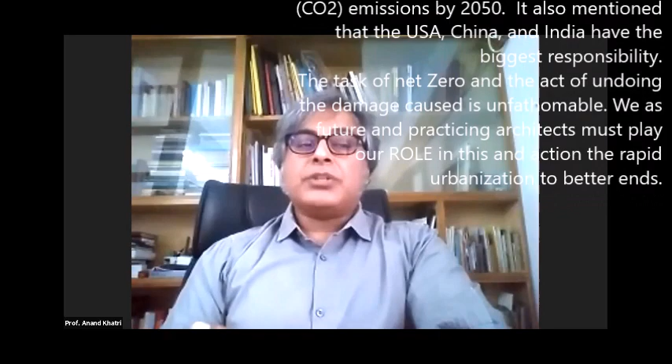The world by and large right now is screeching towards a net zero world ahead of us. The Chilean presidency at the 25th session of COP25 announced a renewed climatic ambition alliance in which 73 countries have committed to accelerate action by 2020 to achieve net zero CO2 emissions by 2050. It lays emphasis that USA, China, and India have to show the way. The task of net zero and undoing the damage is unfathomable. We, as future and practicing architects, must play our role in this and channel rapid urbanization to better ends. None else could be better to discuss this subject than Mr. Ashish Rakheja, who has been demonstrating net zero through practice.

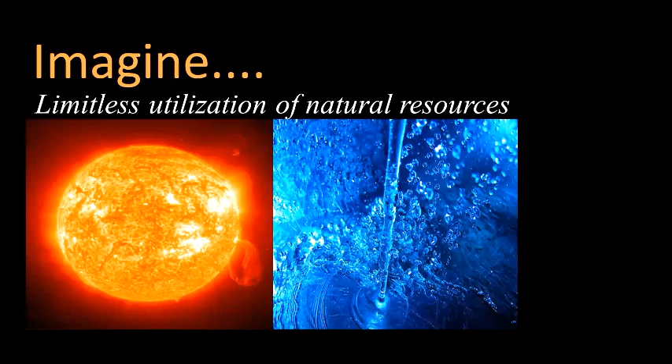A net zero energy building would be one where we utilize natural resources fully and completely, and the building has a minimal carbon footprint. Such a building would be earth-friendly, environment-friendly, and net zero energy. That, in short, is a definition of what a net zero energy building would be like.

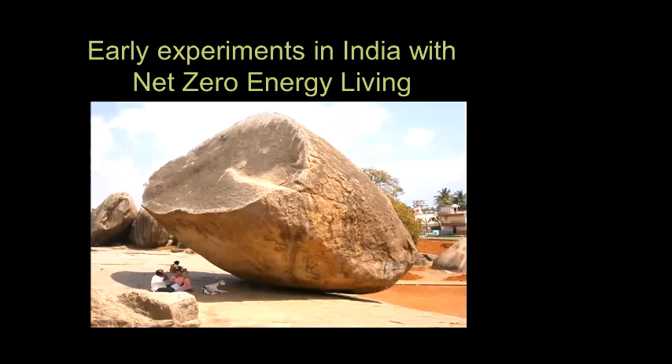Has the net zero concept been around? If you go back in human history, we have always been net zero earlier. Entire human civilization originated from a point where we did not encroach on the planet at all. It's only now, as consumerism grows, that we have been using resources far more disproportionate to what nature allocates us. On a lighter note, you see on screen the early experiments we have had with net zero energy living—that's how human civilization evolved.

Let me start with the fundamentals. Before we talk about net zero energy buildings, let's understand the concept of net zero buildings. It's important to understand this point because there's work going on in all of these areas, and it affects each one of us.

Today, there are many buildings which are going net zero energy. In the net zero building category, the first category is net zero energy, and there are many such buildings. I already mentioned in my opening remarks that governments across the world, and even here in India, have started taking a position on net zero energy buildings.

Going forward, there is a concept of net zero water buildings coming up. These are buildings which are independent of water supply from municipal sources. That means these buildings harness water from the sky and also do water conservation using water efficiency fixtures and measures. Once your consumption in the building matches what you're able to capture from the sky, that's when you get a net zero water building.

Already, Indian cities today are becoming water starved. You may have read newspaper articles saying Bangalore in India is going to be the first 'day zero' city - a city where it runs out of water. Johannesburg and Cape Town are names we keep hearing in South Africa, which have already gone to unparalleled water scarcity levels. Similarly, here in India, there are many buildings and cities now staring at water scarcity, and they are very close all around us.

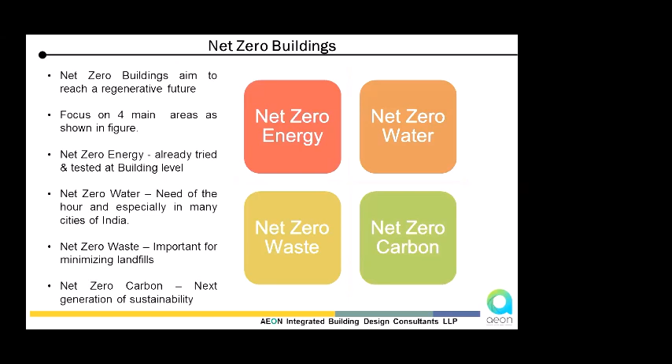Each of these topics - net zero energy buildings, net zero water buildings, net zero waste buildings - is a lecture topic by itself. It can consume more than an hour just to talk about each one. For this talk today, we're going to limit ourselves to net zero energy buildings.

Let's understand what a net zero energy building means. Just imagine a building running on renewable energy. Now, what would a renewable energy source be? In the Indian context, it could be solar, which is the most popular. It could be wind, which is generally available only in coastal areas.

It could be biomass, or geothermal. But generally, since India is blessed - the solar god has been very kind to us - we typically talk about renewable energy source as being solar, because most Indian cities get plenty of solar, and we're able to generate solar power quite satisfactorily. So let me explain the concept of net zero energy buildings with respect to solar only.

So if I have to run a building and meet the daily or annual power demand using a renewable source, I can generate power in the daytime. In the night time, I'll need to run on storage. That means either I generate more in the daytime, store it, and consume it at night. Or the second way would be, since storage is expensive and not environment friendly, I generate more in the daytime, consume what is required by the building, and send the excess power to the grid. And in the night time, draw the power from the grid.

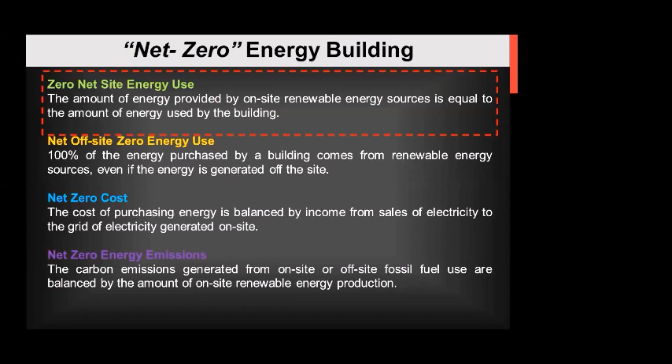If I've got an electrical meter at the entrance of my building monitoring the power sent to the grid and the power coming from the grid, and the net sum is zero, we call it a net zero energy building. We always define this category of buildings as a net zero energy building, not a zero energy building. That's why this term is used globally by all experts - it is called net zero energy building. That's the genesis behind it.

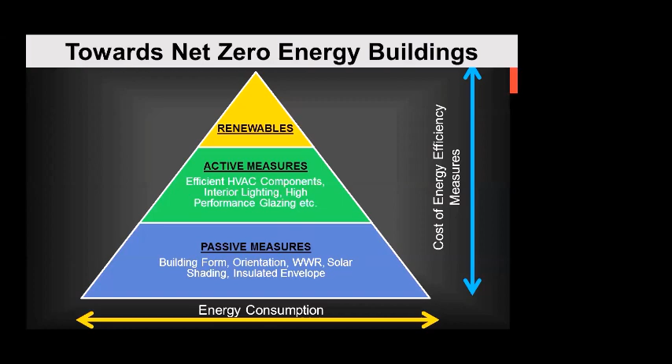I was going through YouTube and I came across this old ASHRAE video, which in very simple terms defines what an approach to net zero energy building should be. I'll play the video and stay quiet while it's going on because you'll hear the sound.

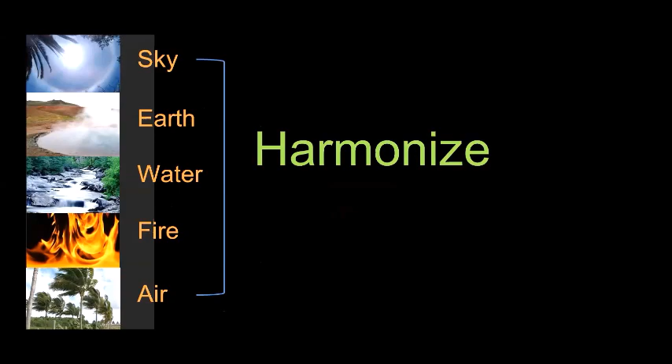Harmonize with the elements that make up nature. Do not fight it. Have a building which respects nature, which takes care of the passive elements. Once you've got the passive elements right, that's the time you apply the technology. And when you've got the right passive design combining with technology, you get what we call a high performance building, and converting that into a net zero is all about putting renewables thereafter.

I'll move straight to some of the case studies, and this would give you the answer better. It'll sort of illustrate whatever I've spoken so far in the last about 20 minutes.

This is a building, an eco-commercial building. This is probably the first net zero energy building of India. The building came up about a decade back. In 2010, construction was started. In 2011, the building was operational. So about 9 years back, this building became operational.

This is why I say this is probably the first net zero energy building, because there was no net zero energy building before that which was documented or available at that point that we know of. When this building was completed, it was done by a chemical giant from Germany called Bayer under their climate protection plan, where they wanted to develop several such buildings across the world. And India was selected as

a venue. And incidentally, this building is in Greater Noida itself. It's very close to the college, and you can go and have a look at that. So this was under their climate protection plan.

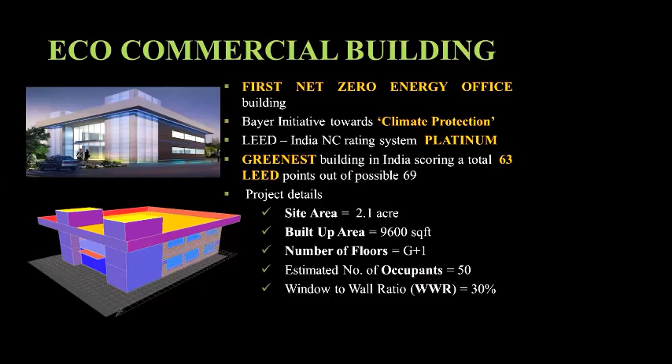In those days, the green scale had only about 69 points. Today, the green scale has 100 points. And out of 69 points in those days, this building got 63 points, making it the greenest at that point of time. It got a platinum rating for sure. So this was a demonstrative building, a small 10,000 square feet ground plus one structure, done as a technology demonstration.

And what I'm going to show you is how step by step this building went for a net zero energy route. What you see at the bottom is a table with 4 columns. The first column on the left shows 3 parameters: the annual electricity consumption in kilowatt hour. The second box gives you the cooling load, air conditioning load, in tons of refrigeration. And the third one is the carbon emissions in tons.

The last box, the fourth box, gives you the improvement that took place with each of the steps. The box number 2 gives you what we started with. So this building had an annual energy consumption of 1,32,000 units. And the fourth box tells you what happened once each of those efficiency features were brought into the design. So here, the orientation itself helped us to cut down the energy consumption by 1%.

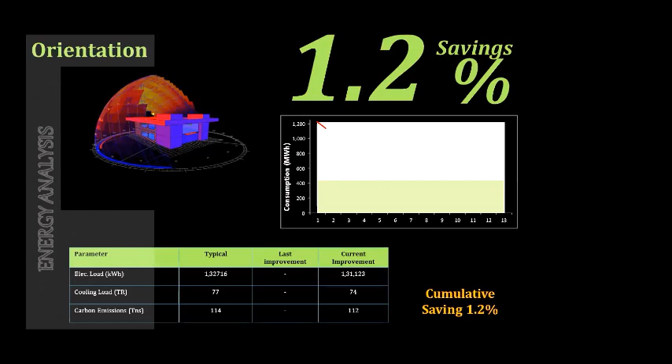And you can see what happened in the reduction in terms of the annual electricity bill, what happened in the reduction in form of the air conditioning load. This building, if you would have done a conventional building at that point of time, would have had a load of about 77 odd tons. The air conditioning load reduced, the carbon emissions reduced, and the annual energy consumption reduced. So just the orientation, which is what I said in the beginning, right passive measures helps you to cut the energy by 1%. Take it further, go to the insulation.

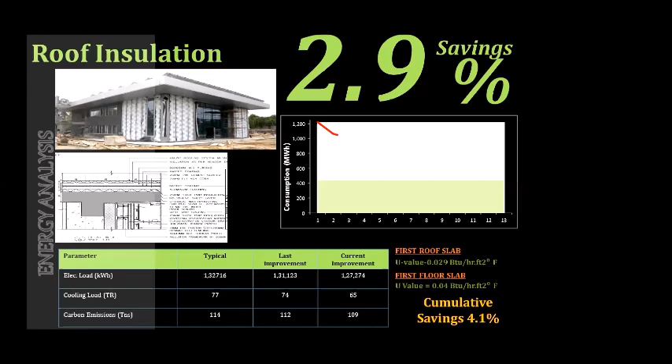We insulated the roof well. Today, if you look at the Energy Code of India, or what is called the ECBC, Energy Conservation Building Code, ECBC talks about importance of roof insulation in all the climate zones of India. And this building followed those principles, put the roof insulation there, and we got a 3% saving in the annual electricity bill. And you can keep watching the box down there, how the reduction in the cooling load, how the reduction in the annual electricity bill is taking place.

Moved on to wall insulation. This may sound something strange to you because wall insulation is something that we do not practice too much currently in India. But if you look at the ECBC code, the Energy Code of India, you will find the wall insulation is specified as a desirable, in fact, as a must requirement for all the climatic zones, and especially the climatic zone where the Delhi NCR falls in. This building had the roof insulation, had the wall insulation, which helped us to save 3% of the electricity bill.

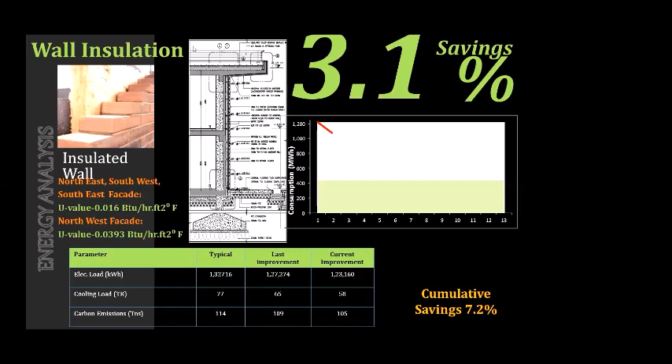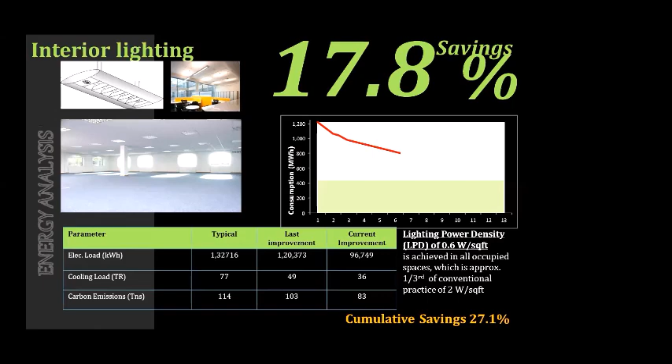Going further, we looked at a good glass, which balanced the daylight, heat, and the glare, and we got 2% energy saving there. We looked at the interior lighting. They were all designed using simulation tools, the lighting falling on the surface only of the table or the workstation, and using high performance lighting fixtures.

We looked at the daylight sensors. These are the sensors which are put closer to the windows where there's plenty of daylight coming in, and what they do is they switch off the artificial light when there's plenty of daylight. Moment that daylight becomes less, that's the time the artificial light slowly, with the help of dimmers, starts glowing. So the user who is sitting there will never come to know; the change in the lux levels will not be apparent, and they will get what we call a visual comfort while sitting there.

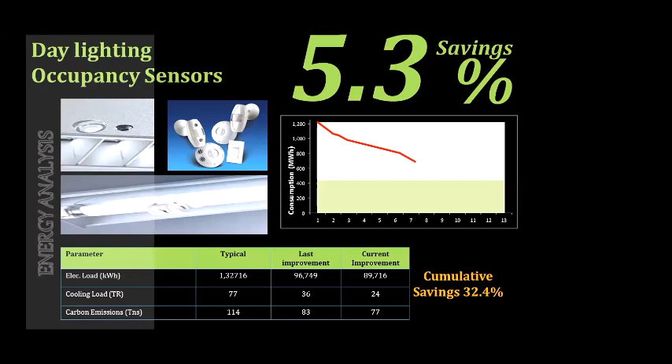So these daylight sensors were introduced, which helped to take away the human errors and ensure the lights are only on when they are required. The occupancy sensors were used in areas like toilets, pantries, or mechanical rooms, so that the people do not leave the lighting on there accidentally. We went to even the external lights, the lights which are outside the building. Even they were optimized using the simulation tools and putting the right lighting. That gave us a 0.1% saving in the energy.

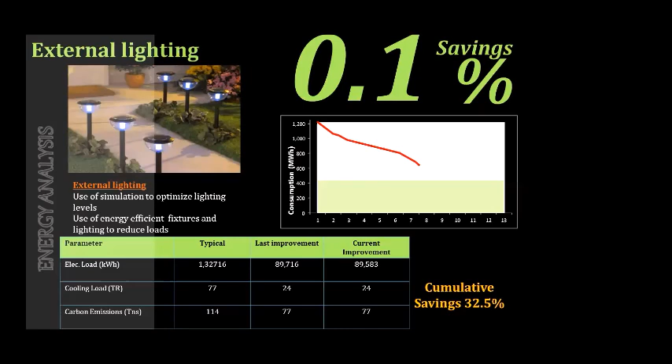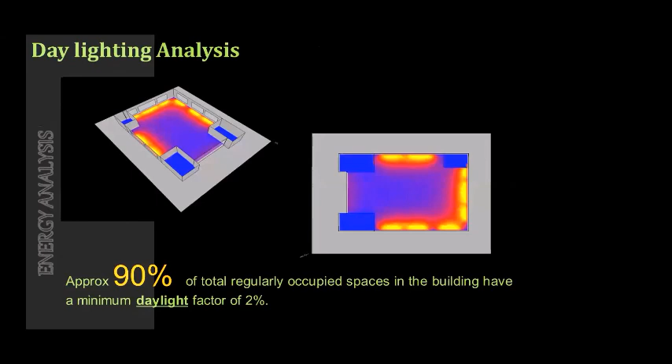Now you would say, why am I talking of 0.1%? The reason I'm talking 0.1% is just by selecting the right external lighting, we reduced the need for installing solar power panels equal to 0.1% of the annual electricity bill there. Going further, the daylighting was optimized. As I said earlier, we had 90% of the areas which are daylit. I'll show you some of the pictures of the finished building, and you will also notice the quality of daylighting we're getting there.

The client was quite driven. In fact, they went out into the market and selected even the office equipment which were best in class. The photocopiers, the printers, or the personal computers, all of them were tendered out, and only those equipment were selected which were consuming the least amount of power amongst all the contemporaries. We benchmarked it. We could save 5% of energy here also.

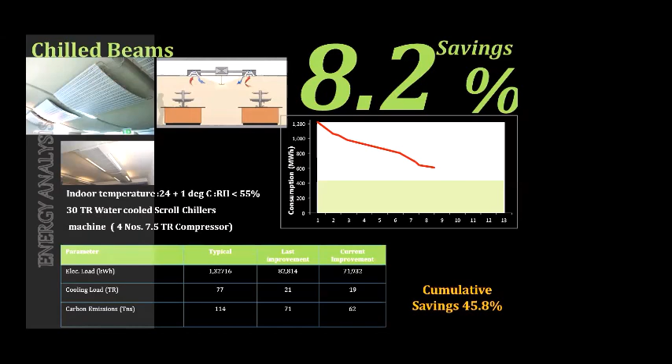We use a central air conditioning plant with chilled beams. It's a convective cooling system which does not require ducting, and you don't need to force the air. It uses the natural convective current where the hot air rises up, comes in contact with the cold surface and falls down. So you get cooling with the natural convective current, which helped us to save further energy.

Even the fresh air which was being added to the conditioned space was done with the help of the carbon dioxide sensors, where depending on the number of people, the amount of fresh air was also varied. That means if you got 10 people in the room, you send in fresh air equivalent to 10 people. If you got 2 people in the room, you send in fresh air equivalent to 2 people.

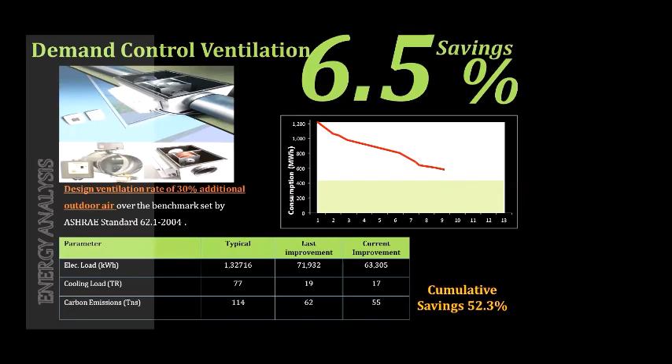The exhaust which was being done from the building, that means what was going out through toilets and all, was cold, because the toilets suck the conditioned air from the rooms, from the nearby areas, and throw it out. Why waste that energy? We recovered that coolness from the exhaust air also, and our fresh air, which was hot, we pre-cooled it with that.

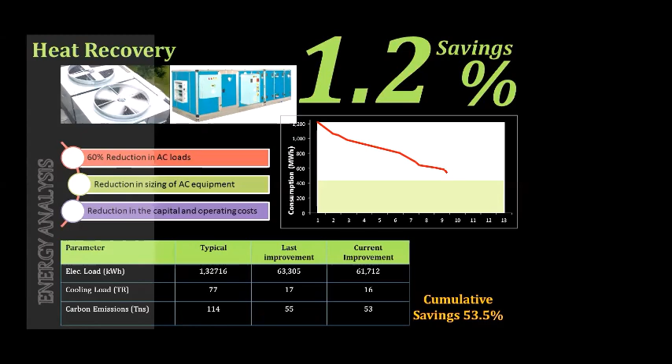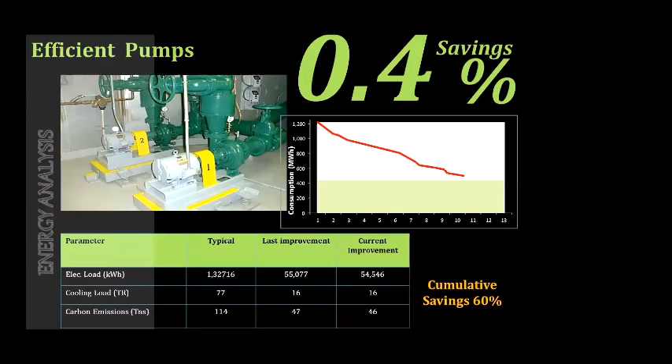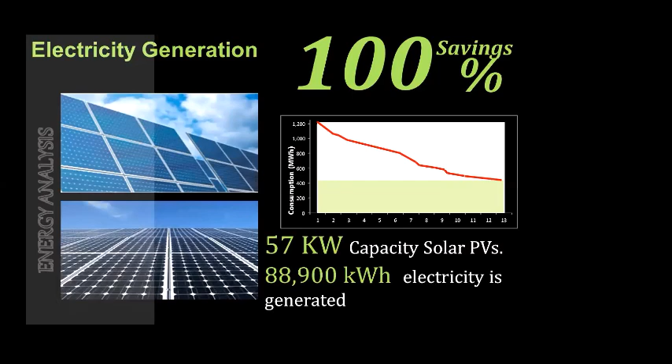Chillers which were used were efficient. They were the best which were available at that point of time. The pumps were very efficient, and overall the combination of the active and the passive measures helped this building to save 60% of the annual electricity bill. And thereafter, it was simple. You put the solar panels equivalent to what was the annual energy bill. 60 kilowatts of solar panels are put on the roof.

Finally, this building in its first year consumed 64,000 units of electricity, whereas the generation was 72,000 units. So you would have noticed the building produced excess solar power, excess energy which was sent to the grid, equivalent to 8,000 units. And the building was not a net zero energy building, it was a net energy positive building, making it a step above what it was designed for.

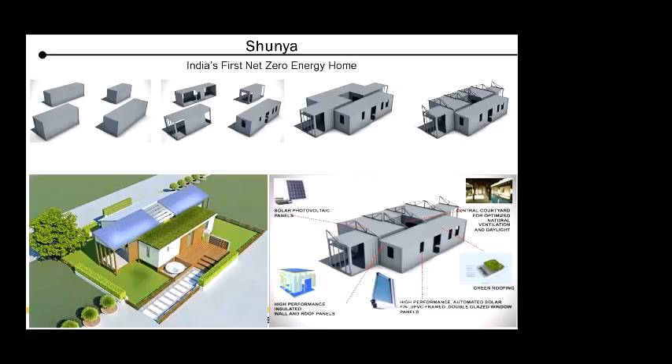This house was a model house. It had a rainwater harvesting system. There was a kitchen garden. There was a green wall, harvesting pits, and everything an ideal house should have. This is what the finished product was. This is how it looked. And you can see the solar panels on the roof, and you can even notice the ribbed structure of the containers. These are shots from inside the house, well daylit.

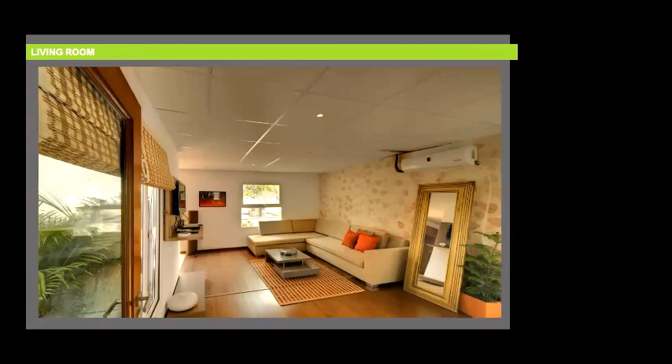On the right is the courtyard that you notice there. I'll show you more images. This is the courtyard, and look at the amount of daylighting which it is bringing into the space itself. The furniture here in this house was also recycled, taken from a Kabadi Bazaar and recycled and used in the building itself. See the shots which are there.

This whole house was transported because it was made out of freight containers. It was transported to an exhibition which was held in Delhi, and nearly 50,000 visitors came and visited this house. It was visited by a lot of students, and a lot of parents also came to have a look at what the future living would be like.

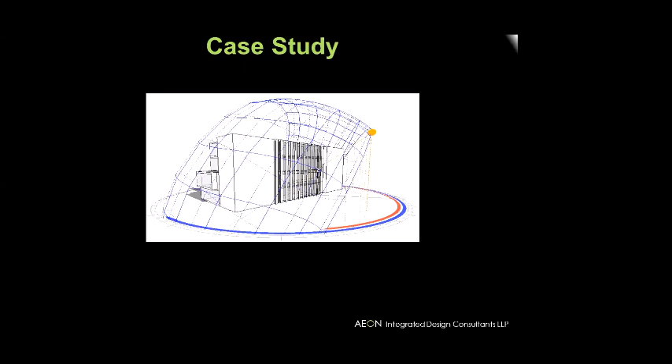The challenge with a tall building is that you have very little area to put the solar panels. The roof area is just this much, and that's not adequate. The solar panels installed there are not adequate to take care of the annual power demand of the entire building.

Thereafter, it was decided that we'll put the solar panels on all the 4 facades including the roof. So all the 5 exposed surfaces which were available, we decided to cover them up with the solar panels. Now it's easier said than done.

The moment you put solar panels on all the 4 walls from outside, on the glass, what will happen is, these being conventional black solar panels, you would lose the visibility. Nobody will be able to look outside. There's no view available. There's no daylight coming in. That's not a building you'd like to be in. So here, a perfect balance was arrived at in terms of daylighting, glare, views, and performance of the solar panels. And I'll show you the process.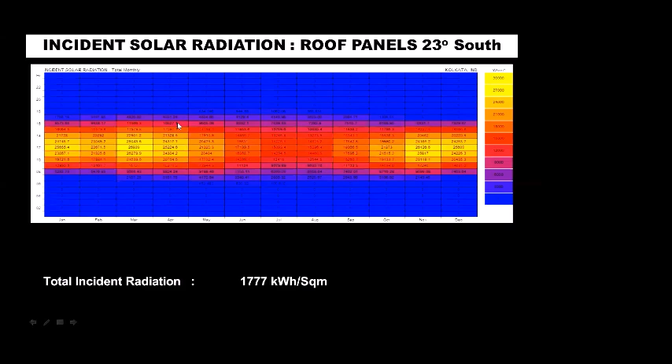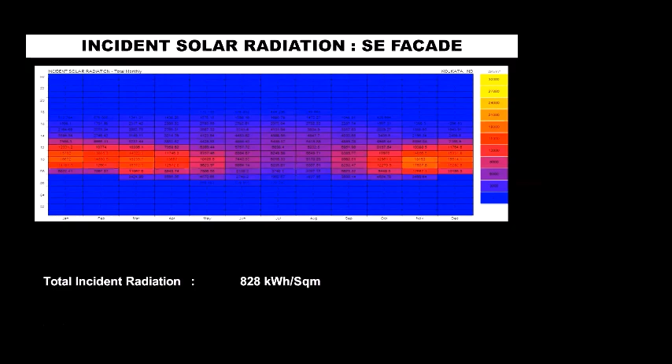So this is how computer simulation tools were used. The solar radiation is being studied. On the y-axis, you will notice, is the time of the day, and on the x-axis is the month. And these are the solar radiations which are falling during various months and different times of the day. Similar studies were carried out on all the 4 facades. There's a southeast facade, northwest, southwest, and they were all looked at.

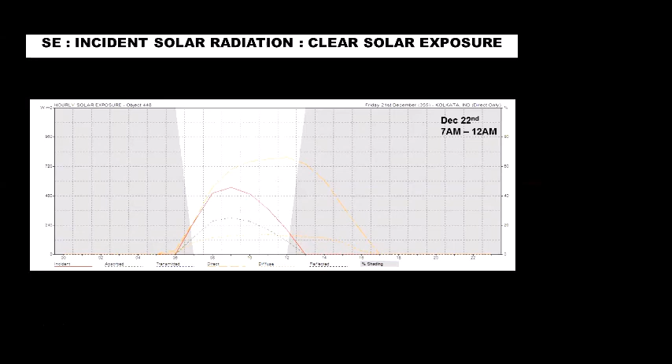Once that study was done, even the solar exposure, how many hours in the day the solar energy is available to us. Similar studies were done for all the months, for all the facades. So this is just for the southeast facade. You can see here June, July, August, September, October, November, December, January, February, all of them are taken care of. And this kind of study was done for the 4 facades.

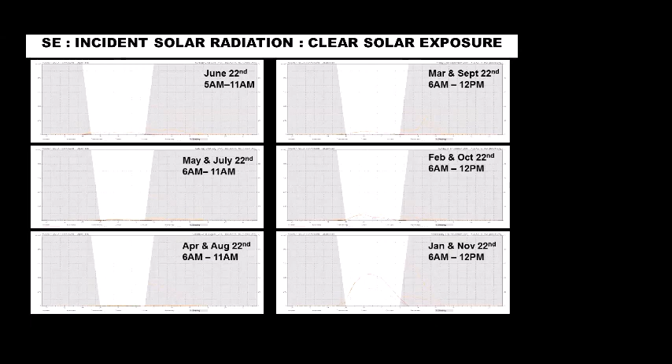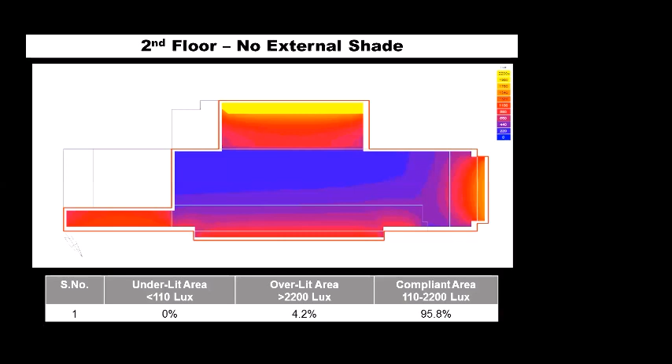If you notice, the floor plate is about 96% daylit. But we are getting glare on the southwest side as well as the northwest side. So we had to balance the daylight, glare, aesthetics, and also the energy performance. So what was done was, solar panels were introduced in an inclined manner on the southwest facade. They were installed like this, what you see as a sawtooth design on the top here. It did stop the glare to some extent, but there was still some glare coming in.

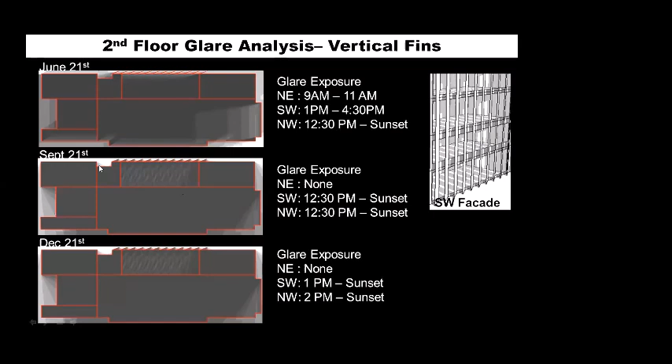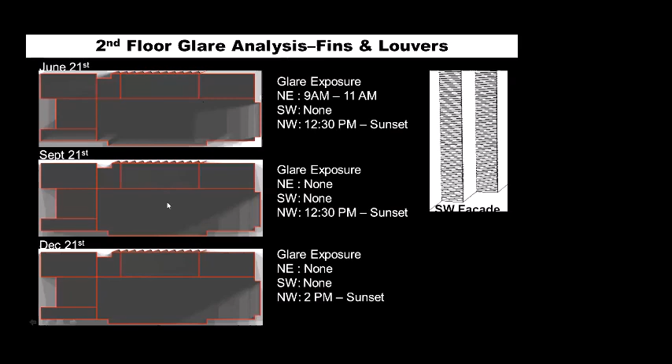To stop that glare further, what was done was, on the smaller side of the sawtooth, a jali was introduced at this point. The moment we introduced the jali like this, we were able to prevent the glare from coming in, but the daylight levels fell down from 96% to 90%.

So what we did was, we made the glass clearer. We went from a 40% visible light transmittance glass to a much clearer glass. As the direct radiations were all blocked, that clear glass helped us improve the daylight back to 100%.

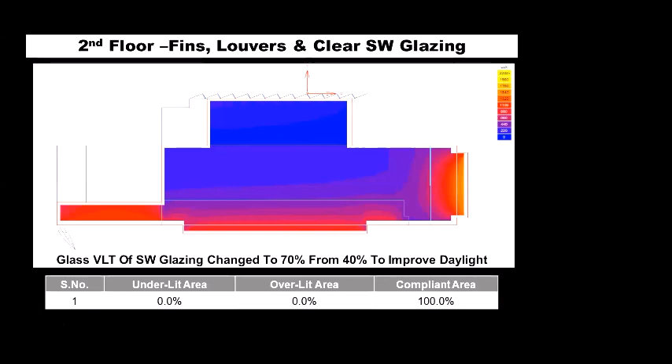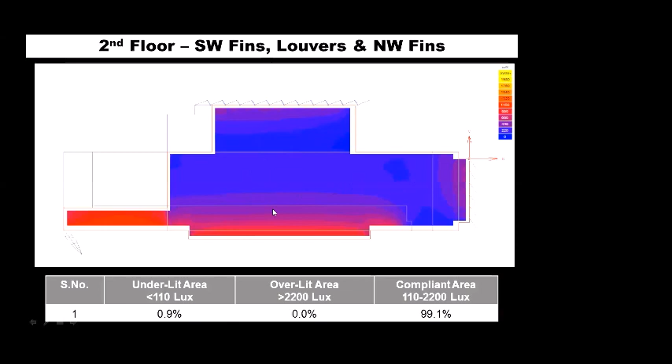But we still had the problem on the northwest side. There was a glare coming in, which was again balanced out by putting the solar panels on that side. And this is the kind of floor plate we got in the end - look at it, 99% daylit, 0 glare, and well-lit floor plate.

Similar exercises were carried out on all 4 sides. On the southeast, there were something like 8 studies done at different angles of the solar panels, different widths of the solar panels, so that we could balance all 4 elements. On the southwest side, we studied 10 such parameters, and we went like this. Once we got to the optimum orientation and design of the solar panel installation, then we could sum it up.

This building had the potential to generate energy from all 4 sides. From the top, we could generate what we call 228 megawatt hours of renewable energy around the year, which works out - if I divide this number 228 megawatt hours by the total built up area - to about 67 kilowatt hours per square meter per year. So this is the number that we could generate from the solar panels there.

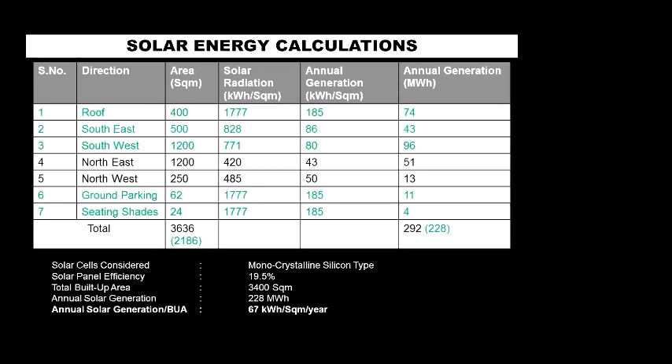Now the engineers kicked into action. They designed the building backwards - that means they took this as a target of the annual electricity bill and started reducing the energy demand, which is what I'm going to show you. You can see here, they started reducing. We started with about 100 kilowatt hours per square meter per year, as against our requirement of 67 kilowatt hours per square meter per year.

And we started bringing it down one by one by using better products and by using technology. Finally, we could get it down to 66.8 kilowatt hours per square meter per year, which was in fact slightly less than the generation capability of 67 kilowatt hours per square meter per year, and you could achieve a net zero energy building design.

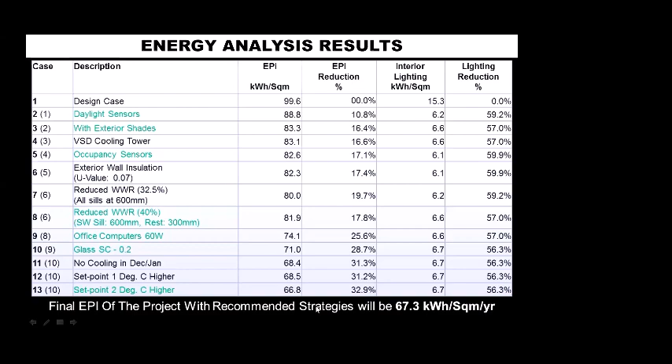Moving to a last case study, which is at a township level, slightly larger. What you see here on the screen is a township coming up in the western part of the country. A lot of these housings are there - these are residential towers. So what the architects have done here is they've created these narrow streets in between the rows of the towers.

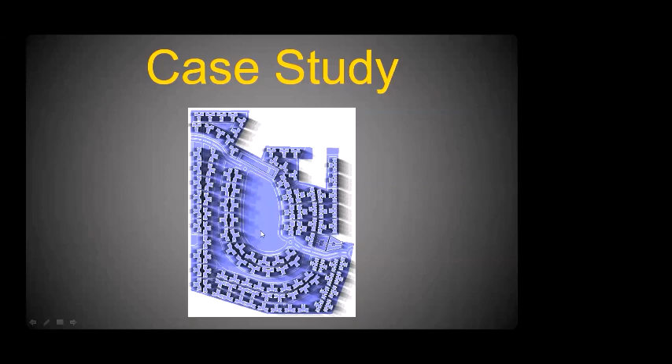The intent is that this narrow street is self-shaded. In this, the pedestrian walking is planned. These are the main roads where the vehicular traffic will be, and this large area that you see in the center is the playground, which is all covered with grass.

So these are the kind of solar shading studies which were done to look at the behavior of this, because this was planned as a net zero energy township. The intent was we start by even looking at the microclimate generation so that the use of air conditioners could be minimized. We could make people go outside, enjoy the nature, so that they stay less inside the houses. When they stay less inside, they consume less electricity, and the lesser energy bills are done.

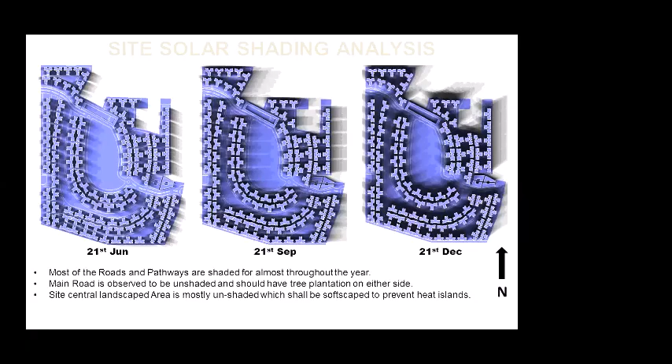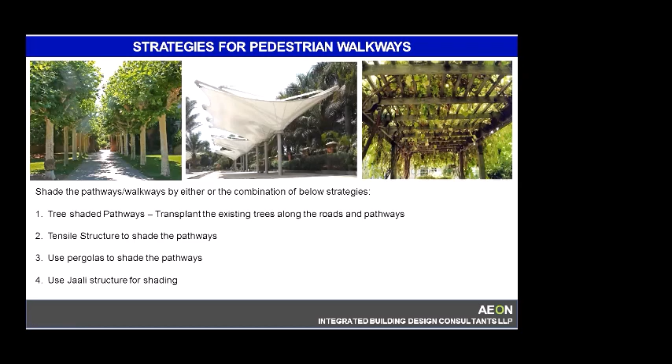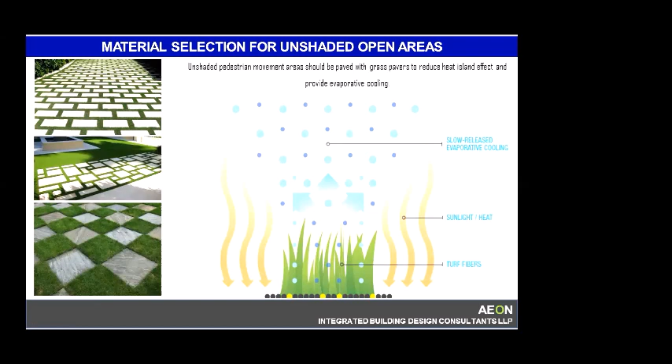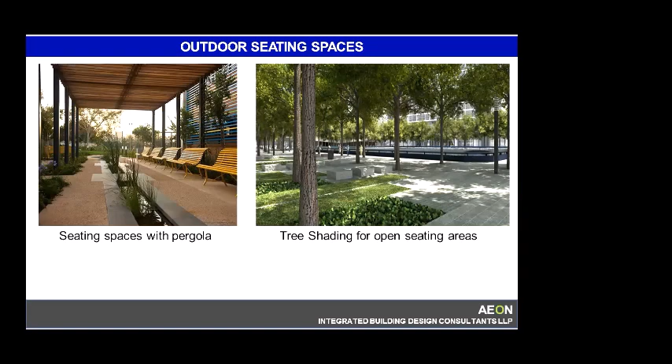Some of the landscape strategies were thought of in order to shade the walkways or the roads, even the pathways, where open paver systems were used so that there's a lot of evaporation of water, and as a result, microclimate generation is ensured. There was strategic placement of trees using a simulation model, where the height of the tree, diameter of the foliage, and distance between the trees were all scientifically worked out, so that even the landscape has a meaning and is able to serve the purpose.

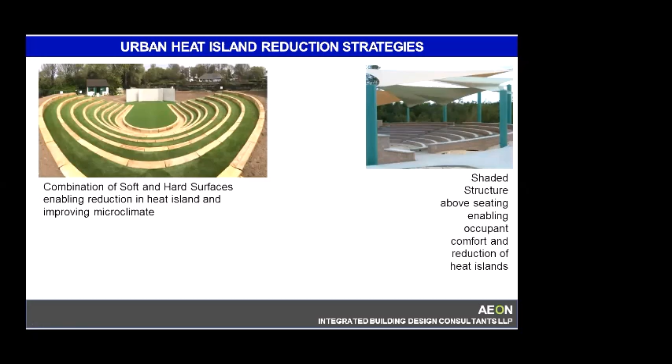These are the parking strategies, looking at solar car parks, even solar trees for car parks. This was very interesting: an amphitheater with concrete seats, and these concrete seats actually have water running beneath them. So even in the daytime, if you sit on the concrete seats or benches, it'll be nice and cool, and the hot water which is generated goes into the building, into the township, and is used by various sources.

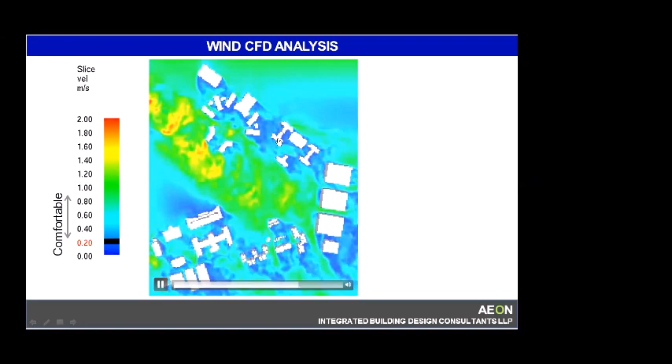I'll show you a closer shot of some of these buildings. This is a CFD model in which the wind is flowing through, and we are studying the profile of the building: how does it obstruct the wind movement? Wherever there's an obstruction taking place, you start solving those areas so that there's wind flow happening there. And I'll show you what we do after that.

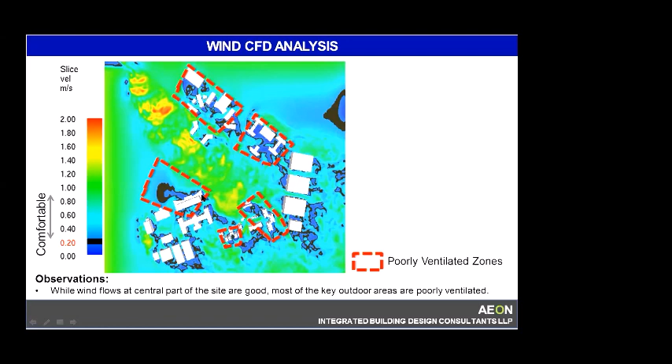This was very interesting. You see there is a concave shaped building, and the concave shaped building is actually arresting the wind flow. So in the final design, this was turned into a convex shape like this, and when the convex shape was created, it became more streamlined and the wind started flowing through it.

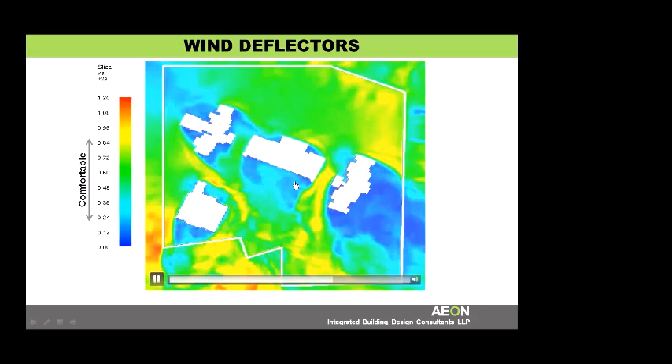This is a closer shot of some of the buildings, and you can notice how the wind is passing through. These are the kind of areas that are still devoid of wind; the wind is not coming into this area. So each and every aspect was being studied, and you can see these are the kind of challenges we were facing there.

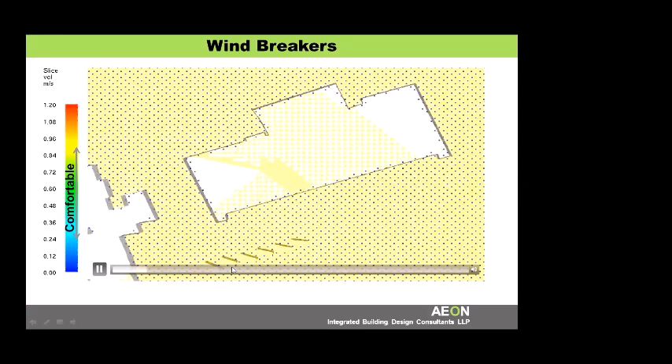So what was done was, there were windbreakers which were introduced. These windbreakers were nothing but tall trees. So what they did was turn the wind around like this, and even the smallest of the areas, it was ensured there's a wind movement taking place.

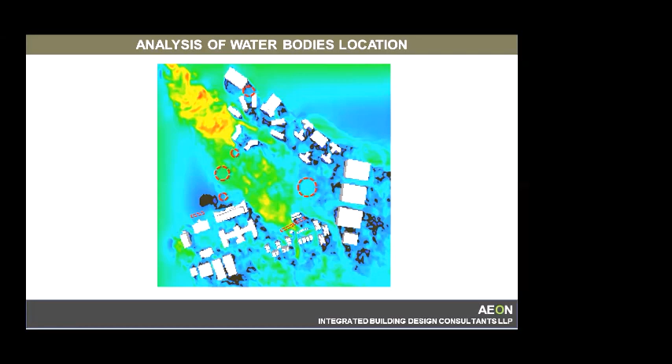Once you've done all that, it's time to install the water bodies. These were all done strategically in the direction of the wind flow, as you can see here. As the wind passes over them and goes into each and every area, there is evaporation taking place. It's colder air passing through, and we expected the ambient temperature would drop by at least 1.5 to 2 degrees, if not more. So with that, you achieve the desired result.

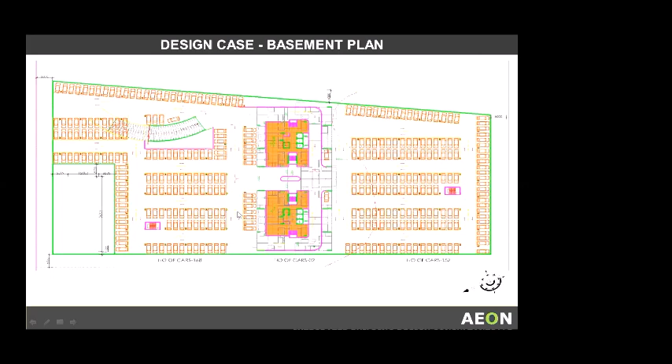Of course, after that, you go ahead and look at each building design, which I've already explained. Even the basement, of which we had only one underneath all the buildings, was converted into a fully daylit and fully naturally ventilated space. Traditionally, basements are regarded as dark areas, dungeons, where people don't go or are scared of going, and they have mechanical ventilation which is energy intensive. So what was done was, there were four big, large cutouts introduced, and these cutouts ensured there's enough daylighting.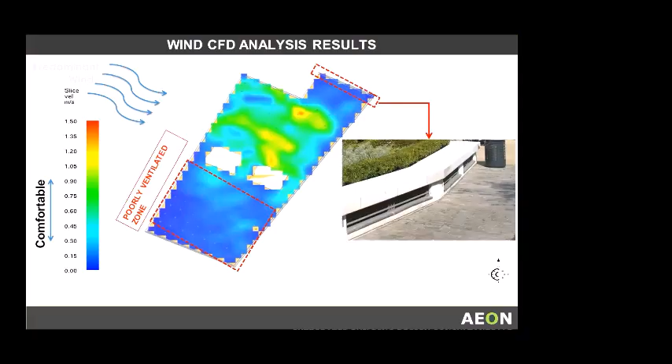I'll just show you, lastly, my own office. Some students from the college have been there; I've had the privilege to host them. We are planning to convert this office also into a net zero energy office. It's currently a platinum rated office. This is what my office is like: a small 10,000 square feet office spread over 2 floors. And see the kind of daylighting we get in our office building.

It's a 100% daylit office with not even a single artificial light required in the daytime, even in toilets or pantries. The office has a green platinum rating and also a second platinum rating called health and well-being platinum. The green rating focuses on energy and water efficiency, while the health and well-being rating looks at the well-being of the people inside. So it's an office which is first of its kind to get a double platinum rating from the Indian Green Building Council.

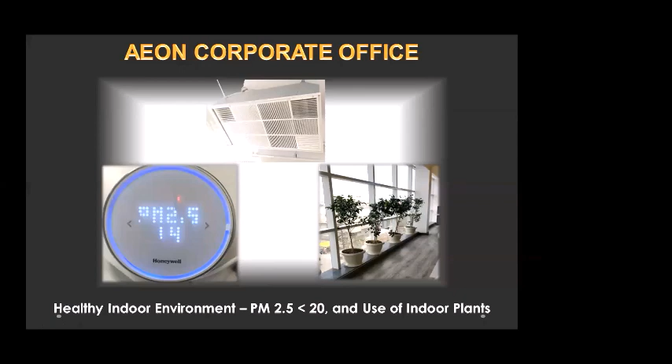Some of the other features are clean air inside. What you see here is the PM 2.5 levels, which we hear or read about in newspapers during winter days, where the ambient air quality in Delhi, the PM 2.5 levels, go to 500. This office has a number which is less than 20.

The temperature maintained inside the office is 27 degrees, and we use these high volume, low speed fans which do not create sound but just create air movement. With the air movement and 27 degrees centigrade, people get a feeling as if it's 23 or 24 degrees centigrade inside. The furniture is recycled and remodeled from the old office.

The energy bill has yet to cross 70,000 rupees for the 10,000 square feet office space. To give you context, typically similar offices would have an energy bill 2 to 3 times compared to this one.

The last bit, I'll show you what is happening in India by the green building councils. Looking at the success of green buildings or net zero energy buildings that are coming up, there is a net zero energy building rating which has been introduced by the Indian Green Building Council.

As most countries in Asia are blessed with renewable energy sources, it is only natural that buildings are turning towards net zero energy buildings. There is a body called World Green Building Council, WGBC, and all the green building councils of the respective countries are part of this. So the Indian Green Building Council is also part of the World Green Building Council.

The World Green Building Council has come out with a directive that by 2030, all new buildings must become carbon neutral or net zero energy. By 2050, the desire is that all existing buildings also, meaning 100% of the buildings in the world, must become net zero carbon or net zero energy buildings.

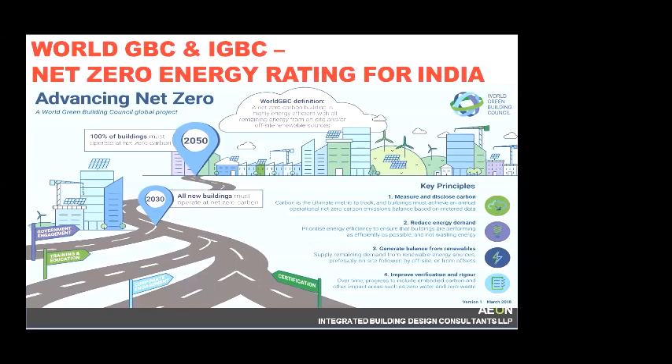So with that kind of mindset and vision going on, you as young architects are well placed to enter this arena and become part of this.

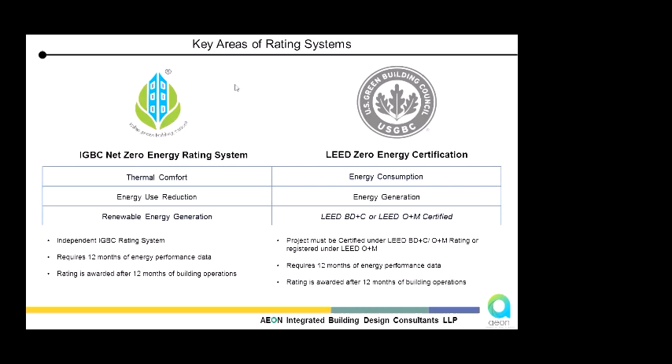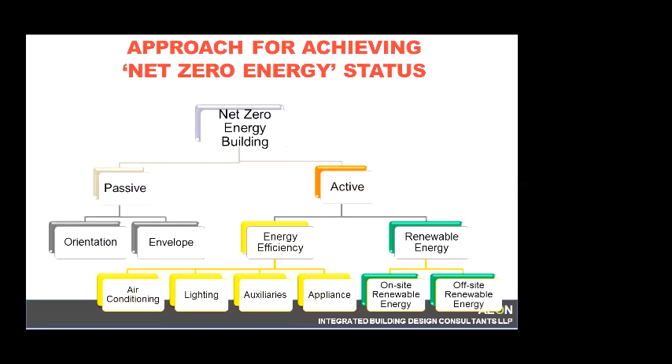The Indian Green Building Council has a rating system for net zero energy buildings called the Net Zero Energy Building Rating System. Similarly, the US Green Building Council has a LEED rating system called LEED Zero. Both rating systems have a similar structure where they look at one year of power consumption data and also generation data. Once you demonstrate that one year of data to them, you get what we call a net zero energy building rating. The focus of this rating system is very similar to what I told you earlier: it looks at the passive and active elements, and focuses on what we call energy efficiency.

Out of the 100 points which this rating system has, 75 points are for energy efficiency. Once you make your building efficient, the remaining 25 points are given for renewable energy generation. So the focus remains on energy efficiency for net zero energy buildings.

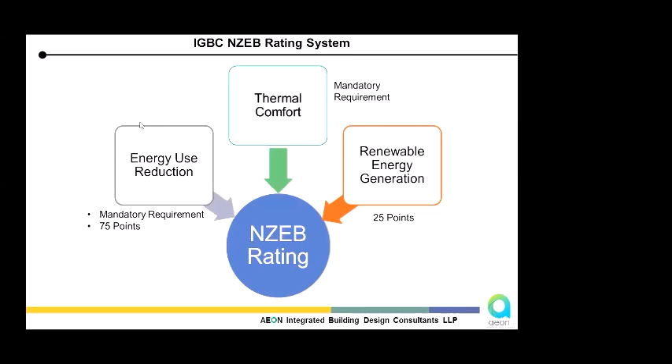These are some of the buildings in the last one year, since this rating system was introduced, which have gone net zero. There are already 5 buildings, including the Indian Green Building Council's own headquarters in Hyderabad. That building is today a net zero energy building with 138 kilowatts of solar panels installed on the roof.

These are special solar panels which are bifacial. Bifacial solar panels are those which generate power not only from the top of the panel where the modules are kept, but also from the reflective energy which falls on the roof and reflects back to the underside of the panel, where modules are also placed. So these are called bifacial solar panels.

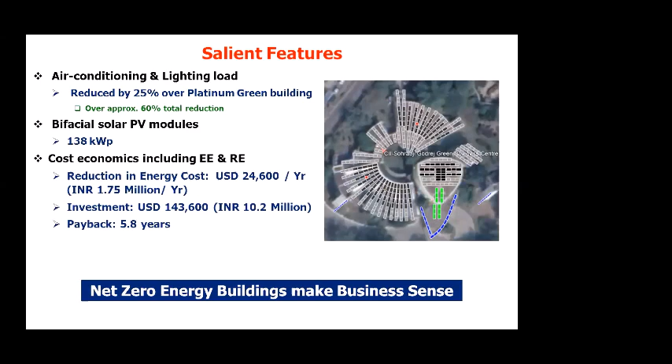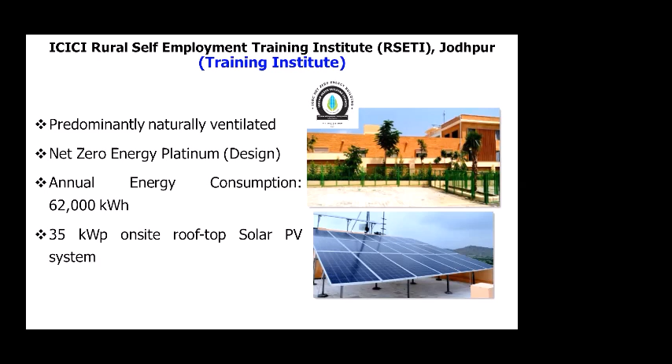You might have heard about it and read about it in the newspapers, that our Kochi airport is a net zero energy airport. It's the first airport in the world to go net zero energy. Delhi Metro is putting solar panels on top of every metro station. I'm working on the Nagpur Metro, where we have solar panels on top of every metro station.

So as we move forward, today new educational campuses are coming up. There is a Nalanda University coming up in Bihar, which is looking at net zero energy performance. I heard about a similar university coming up in the Chandigarh area, also looking at net zero energy performance. What they do is, in these 100-acre universities, they set aside a 5 to 10 acre area and put up a solar farm, and that solar farm ensures that the power demand for that campus is taken care of.

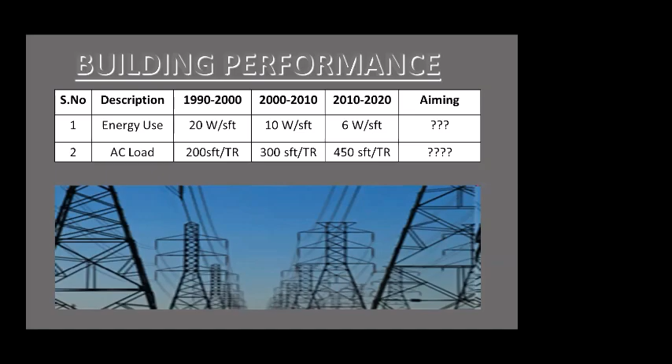So as we move into a super-efficient, well-designed building era, with more such buildings emerging, it's time we start looking at net zero energy buildings too, because offsetting the remaining energy with renewables is a reality that can be done, and solar, the primary source used in our country, has become so cheap that it's worth it.

So I'll end by saying that net zero energy buildings are not just about how we design, but also how we operate. A well-designed building, if operated wrongly, brings us back into the same problematic zone. So you not only need to design the building correctly, you also need to operate it correctly.

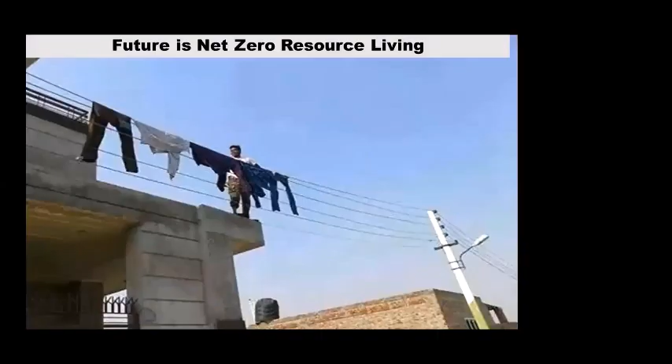And my prediction for the future, how do I see it? A lot of people ask me this. This is how I see we'll use our power lines in the future. The ugly power lines we see all across cities, we can put them to better use. Why throw them into the landfill? Let's use them for drying clothes, as this gentleman is doing, because we'll be generating and using our own power. We won't need these things.

Thank you so much. That's all from my side.